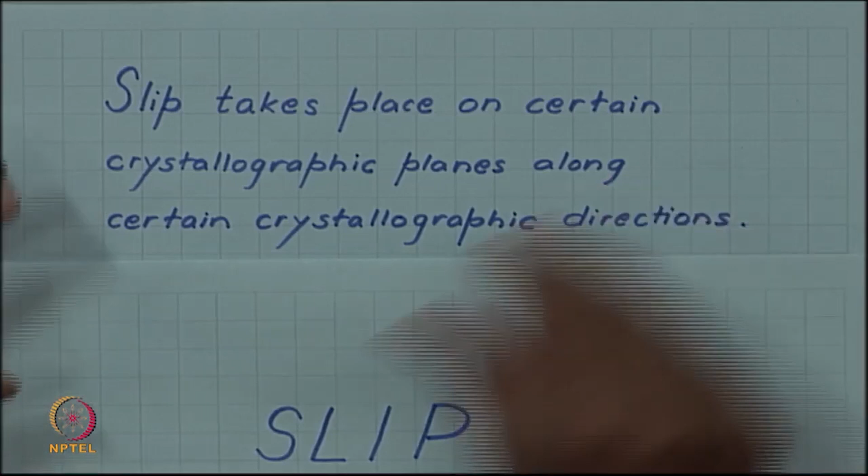One of the experimental observations regarding slip was that slip takes place only on certain crystallographic planes along certain crystallographic directions. When slip became important in the consciousness of scientists working on plastic deformation, they started doing careful experiments. These require a lot of careful work on single crystals and with X-ray diffraction, because you have to find the orientations of the crystal before deformation and after deformation. Such careful experiments established that in any given material, in any given crystal, when you are deforming, slip takes place on certain crystallographic planes along certain crystallographic directions.

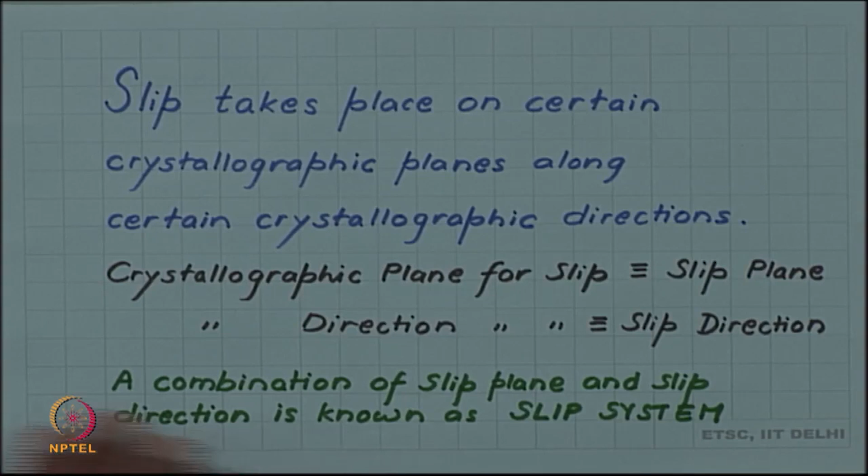By crystallographic I mean that a particular, specific Miller index, a particular orientation of the plane, will be suitable for slip, not all planes. Similarly, certain crystallographic directions will be suitable for slip and not any arbitrary direction. The crystallographic planes for slip were known as slip planes, and the crystallographic directions were the slip directions. We also have a term called slip system, which is a combination of slip plane and slip direction lying in that plane.

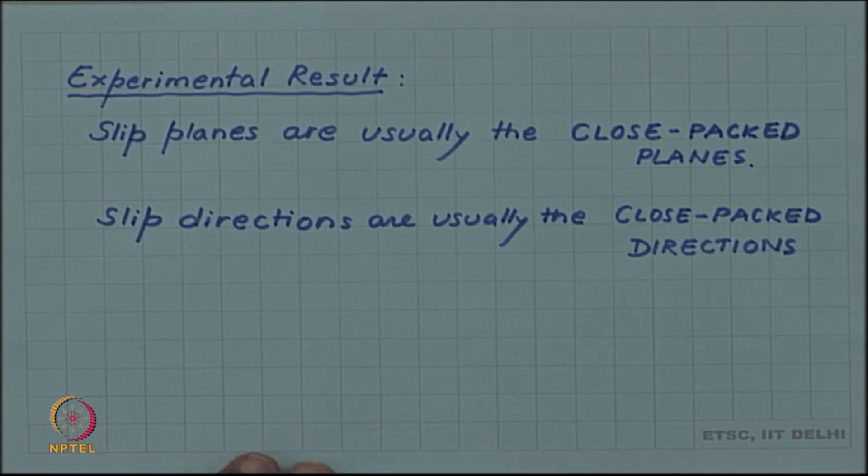With this terminology, slip plane, slip direction and slip system, let us look at the next interesting result, again an experimental result: slip planes are usually the close packed planes. We have seen various crystal structures, and particularly in cubic close packed and hexagonal close packed crystals, there are certain planes with a very high density of packing, and they are the close packed planes. Similarly, certain directions are close packed directions. For example, in cubic close packed structure, the face diagonals are the close packed directions. When these experiments were performed, they found that slip was happening on these close packed planes in these close packed directions. Of course, this threw up the question of why close packed planes and close packed directions are favored.

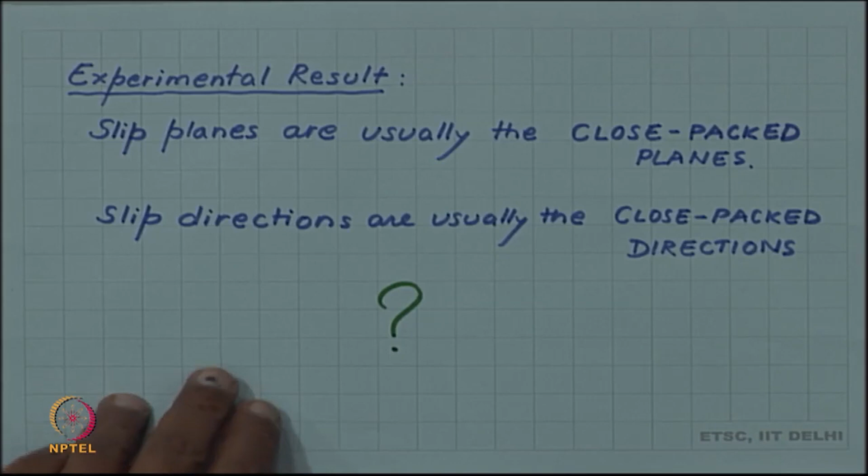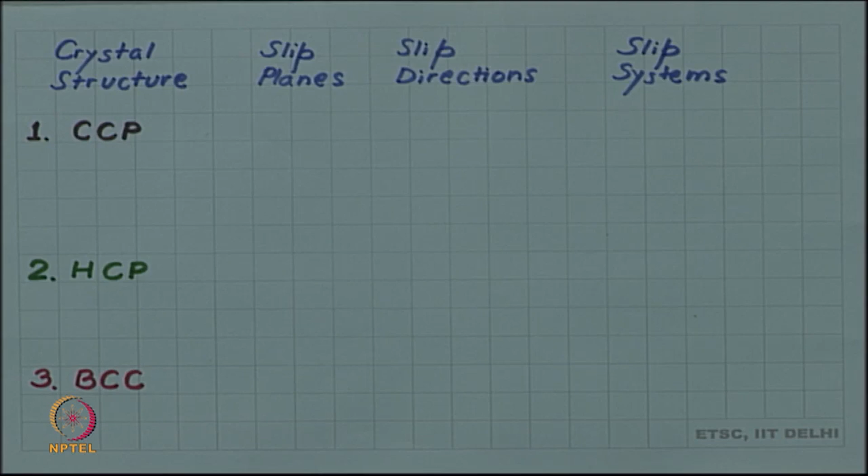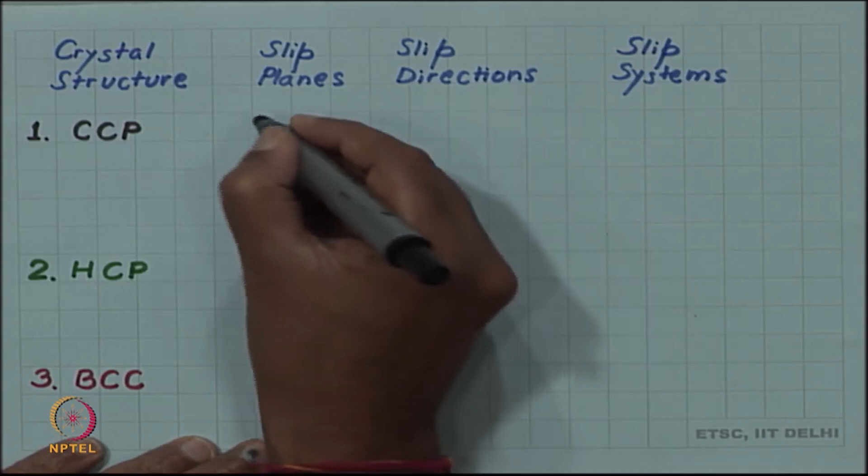We will look at it as we go along, but let us first note down what result they found for different crystal structures. For cubic close packed structure, as you know, CCP, the slip planes, the close packed planes in the cubic close packed structure, are of the {111} type. You will need to review some of the crystallography videos we have seen, where we discussed these things. So, close packed planes in CCP are of the {111} type, and the slip direction, the close packed direction, is of the <110> type.

Notice the use of brackets. I am using curly brackets because it is not just the (111) plane; there are 4 such planes in the crystal. Similarly, there is not just one <110> direction. This is a slip direction, a close packed direction in the cubic close packed structure, and it is the face diagonal. There are 6 different face diagonals in a CCP crystal, so the number here is 6. For the total number of slip systems, the way to write a slip system is to write the plane and direction next to each other. So, we will write {111}<110>.

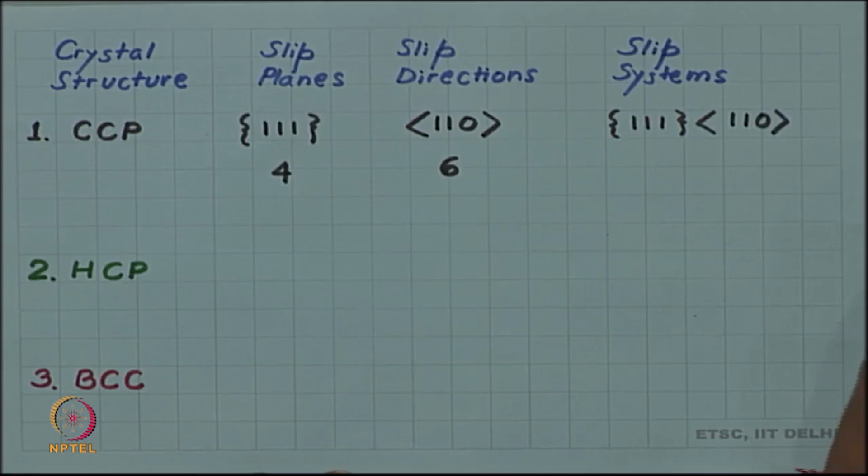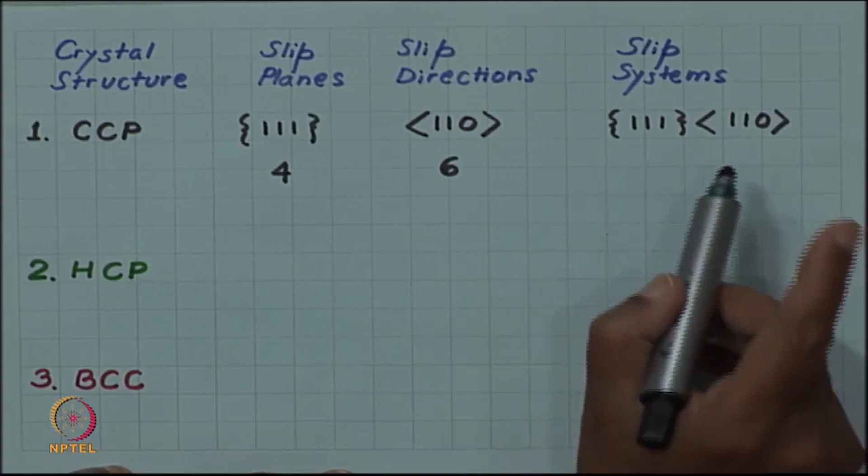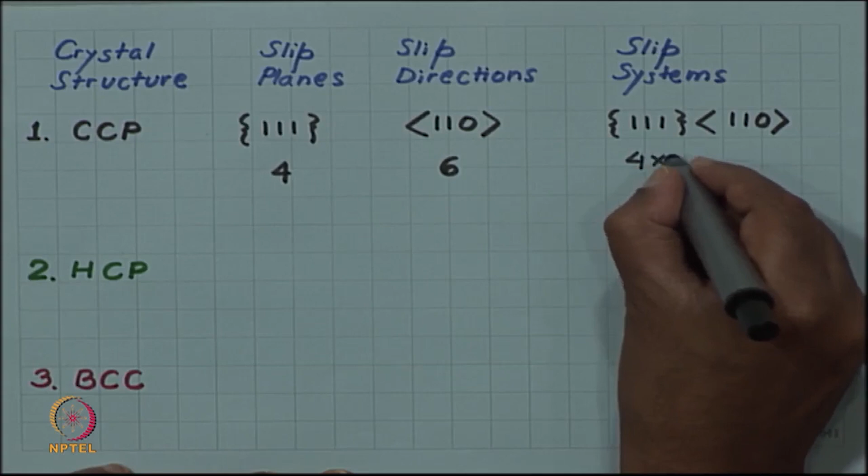But recall that we have 6 directions and 4 planes. So, we may think that there will be 24 slip systems, but not really, because out of these 6 directions, all 6 do not lie on each of these 4 planes. In any given plane only 3 of the slip directions lie. So, for every plane we have 3 directions. So, for 4 planes we have 12 directions. So, 4 into 3, 12 slip systems are there.

Sometimes if you really want to be careful, you can insist that the direction lies on the plane. So, you can satisfy the particular choice which you have made using the Weiss zone law. So, I can write bar 110 instead of 110, but recall that the bar 110 family is the same as the 110 family, because it also belongs to the same family, and any member of the family can represent the entire family. Only here writing it as bar 110 then satisfies the Weiss zone law with 111 that I have written here. So, it shows that the slip direction should lie on the slip plane, and that is why we have 4 into 3, 12 slip systems and not 4 into 6, 24 slip systems.

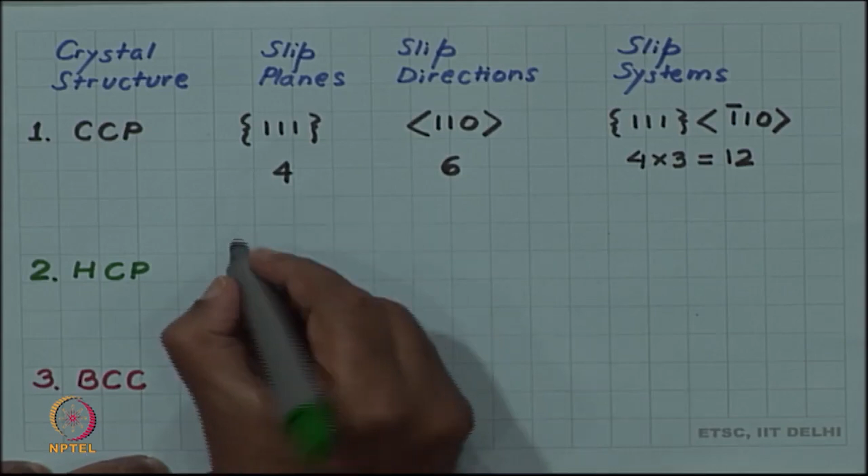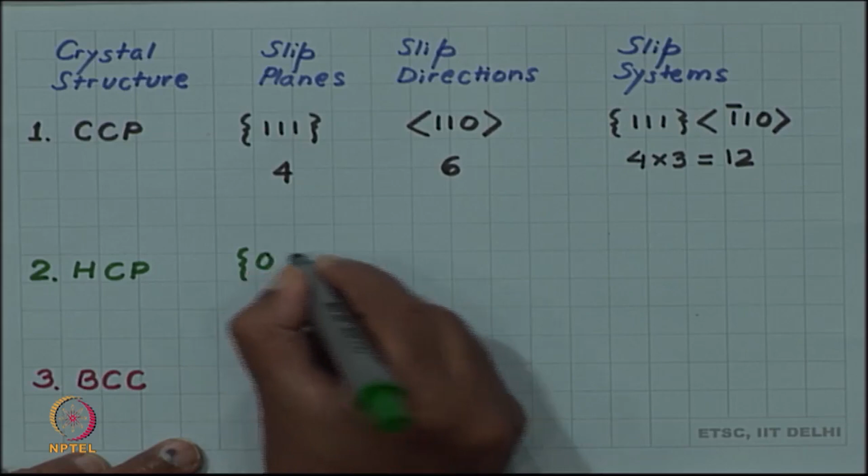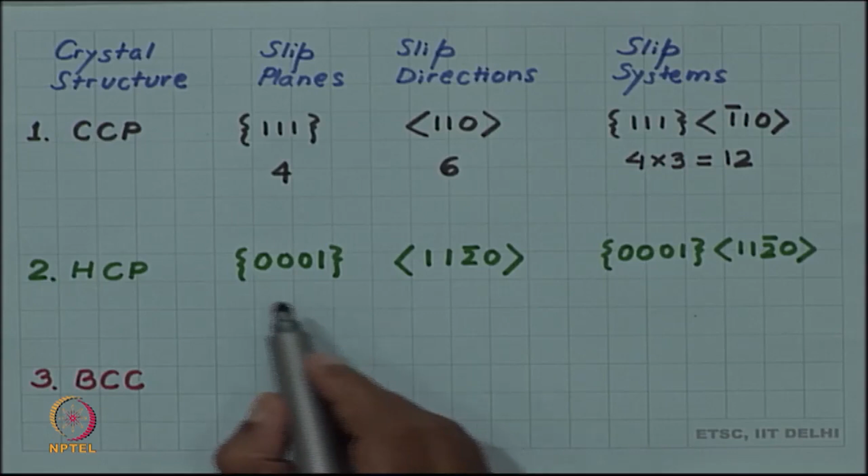In the hexagonal close packed system, we have the 0001 plane as the slip plane, and the 11 2 bar 0 direction as the slip direction. So, you have this as your slip system. Here, if you think of 0001, this is actually a basal plane. This is what is called the basal plane, and there is only one set of such planes. And in a given plane in a hexagonal crystal, there are only 3 such slip directions, 3 close packed directions. So, you have a rather limited number of slip systems in hexagonal, that is only 3 slip systems.

It is an experimental observation that many hexagonal close packed materials are actually brittle, whereas many cubic close packed materials are quite ductile. And one reason leading to this sort of behavior is the number of slip systems itself. You can see the paucity of slip systems in the hexagonal close packed system will lead to a lack of possibility of slipping, and that is why a lack of possibility of plastic deformation. And if plastic deformation cannot happen, the material cannot deform and it will behave like a brittle material, whereas cubic close packed has a number of slip systems and behaves in a ductile manner. This is a very simplistic explanation, but this is one of the pointers towards this difference in the behavior of CCP and HCP materials. Finally, if we look at BCC,

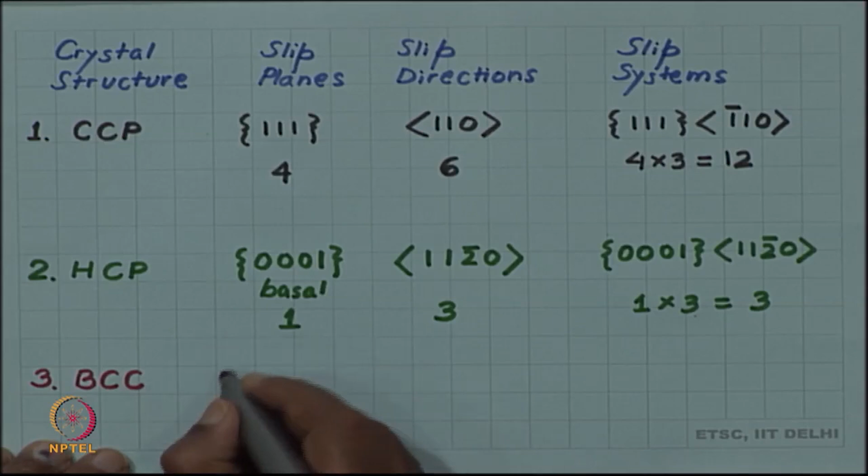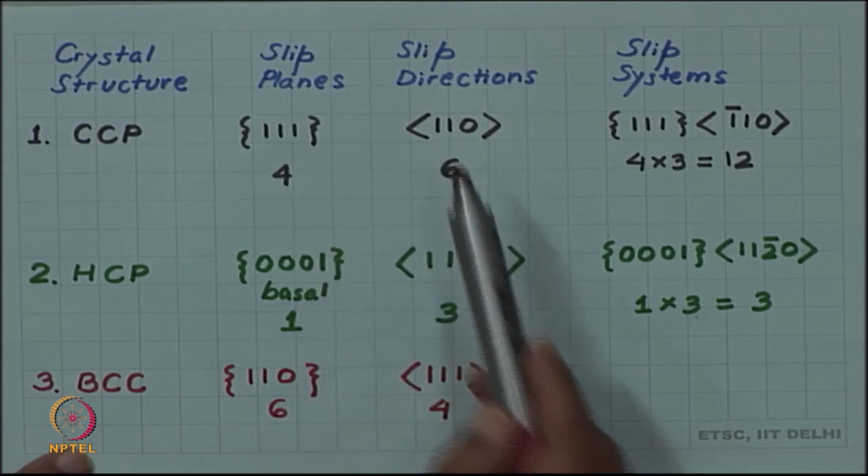in the BCC there is actually no close packed plane. So, the nearest close packed plane is 110, but there is a well defined close packed direction, that is the body diagonal. So, it is 111. So, if you look at the numbers again, this 110 comes out to be 6 and this 111 comes out to be 4. You can see that the situation is just reversed from that of CCP, and then you have the slip system. I can again make it consistent with the Weiss zone law, and you will again have 12 slip systems.

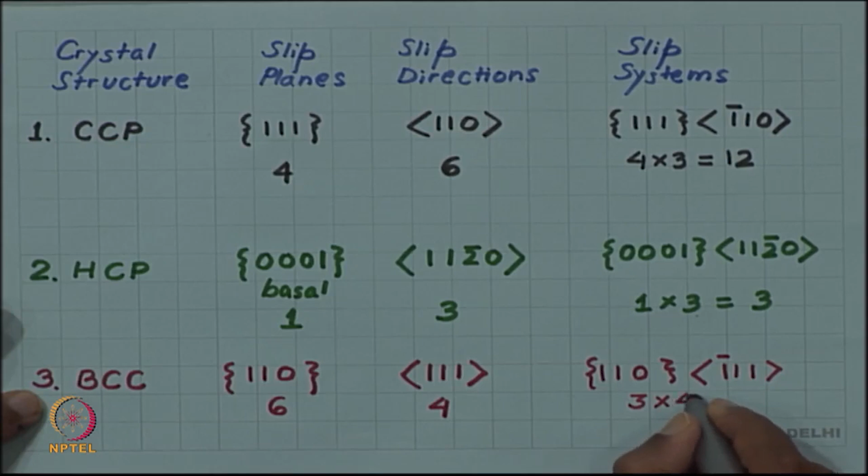In fact, if I am making a mistake here, although you have 12 slip systems, we have to look at it carefully. There are 6 such 110 planes, and in each plane there are only 2 directions. So, I should write it as 6 into 2, 12 slip systems. I leave this as a crystallographic exercise for you to work these out. I have only given you the outline. This you can do easily.

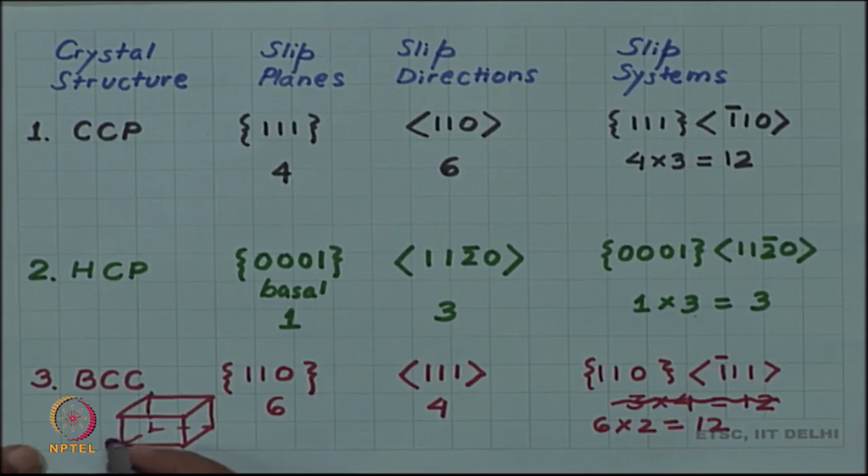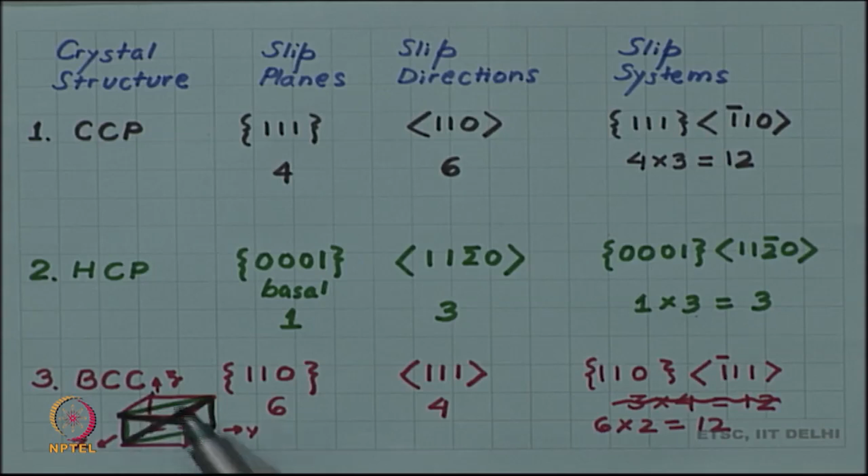For example, what I said about the BCC can be seen in the BCC unit cell. So, if you take this as your x axis, y and z, then a 110 plane will be this green plane, and the 111 kind of directions, the body diagonals, are the 2 body diagonals which are lying in this plane like this. So, this green plane and these 2 directions give you 2 out of these 12 slip systems. I leave this as an exercise for you to find out the other 10 slip systems and draw them for BCC, as well as do that for HCP and CCP.